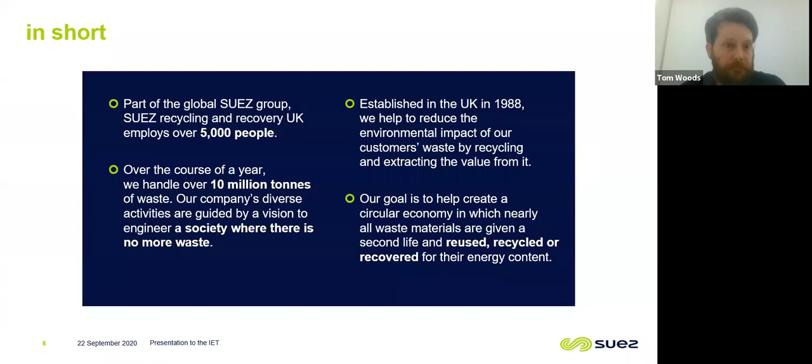A brief look at the figures of the company. I think I will pick out some key ones based on this lecture.

So in terms of our energy recovery, we have 7 energy from waste facilities, which is the mainstay of my work in the group. We have operating landfill sites and closed landfill sites, which have some energy recovery as well through gas combustion. We also have a number of other sites using more novel techniques, which I'll discuss later, to recover energy from waste. I think one of the key figures is the amount of megawatt hours we generate, both from our landfill gas engines and from our energy from waste facilities.

When I started with this company, it was more flipped the other way around, and we were mostly recovering energy from landfill gas. Now we are mostly recovering energy from waste plants, and that trend is only continuing. These are 2016 figures, so it will be significantly more that way now.

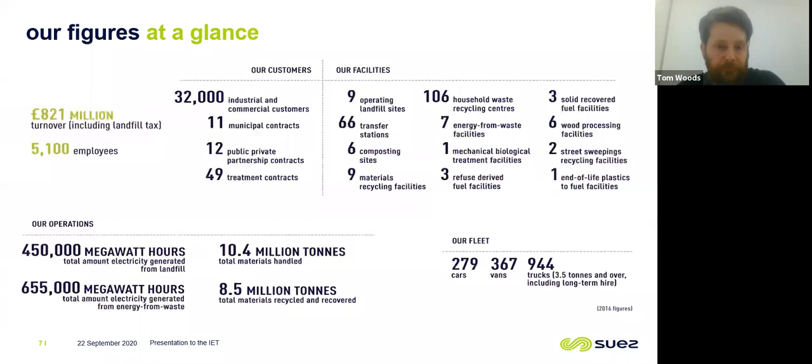As I discussed, the circular economy is the guiding principle of SUEZ. You can see the various parts of the manufacturing and economic cycle here. The bit where things come out as waste is what we're trying to cut down on, and that's traditionally what SUEZ, or SITA as it was, did. It collected waste and threw it in the ground, and that was really the business. Now we're looking to do things a lot more intelligently, a lot more sustainably, I think, is the key.

So the part of the company I mainly sit in is this part here, the recover part, so energy from waste. We're looking to recover the energy from the residual waste that can't be recycled.

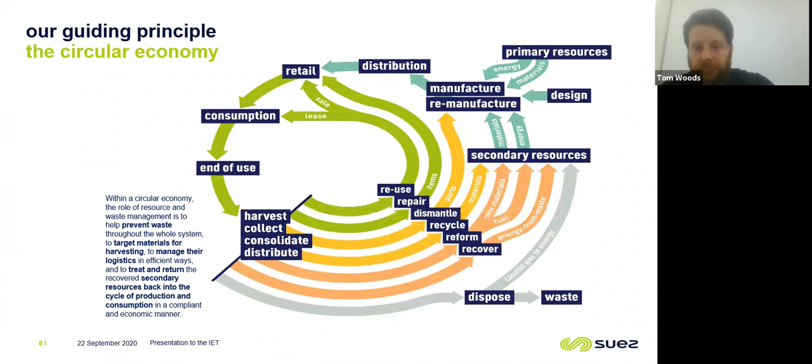I mentioned that we have a French parent company, SUEZ. We originally started SITA with SUEZ. This is just to give you an idea of the global scale of that business - it's waste and water. Obviously, I work on the waste side, and we talk about waste today, but we see there's a substantial water business as well. We're based in Paris, a large multinational company.

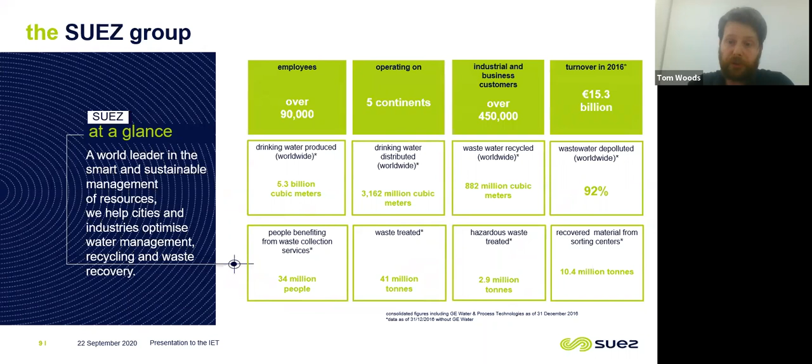A couple more key figures. I think we've had some of these on a previous slide, but you can get a sense of the scale of the amount of tonnage we handle through our facilities each year.

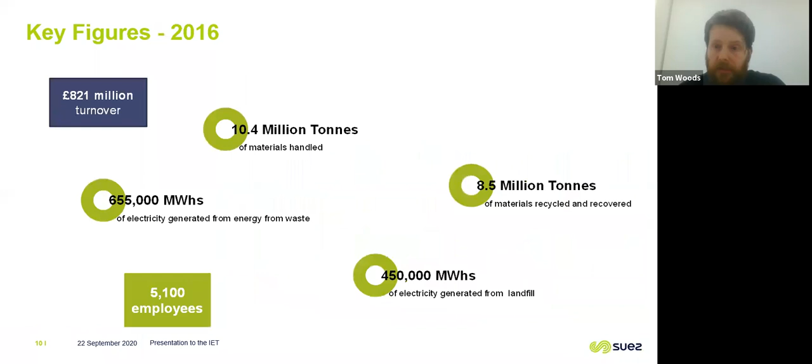This slide I touched on a second ago really does illustrate the change both in SUEZ and in the waste industry in general in the UK. This graph started only in 2009, so it's not that long ago in the grand scheme of things, and you can see the high percentage of landfill our business was then - we're looking at 90% of our business being landfill, potentially a bit more, as you see from that graph. That was obviously just before I started at the company.

As we move forward, you can see a very rapid increase of energy from waste, a very rapid increase of alternative fuels in our mix, and also the recycling. This is a projection, currently based on 2017 figures, but as you can see, we've continued to grow on the energy from waste side, and landfill continues to fall.

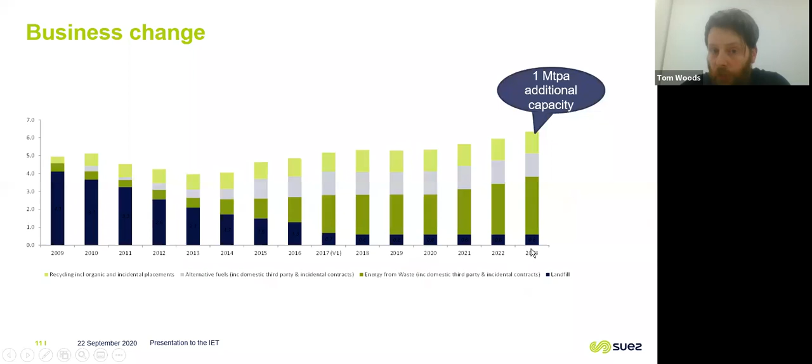So I mentioned it in passing, but municipal solid waste, that's MSW - that's your general black bag waste, as it were. That's what you produce domestically, what you put in the bin. It's everything that you don't put in the recycling bin, or the food waste bin if you have one. You can see this is a typical composition of what we get through.

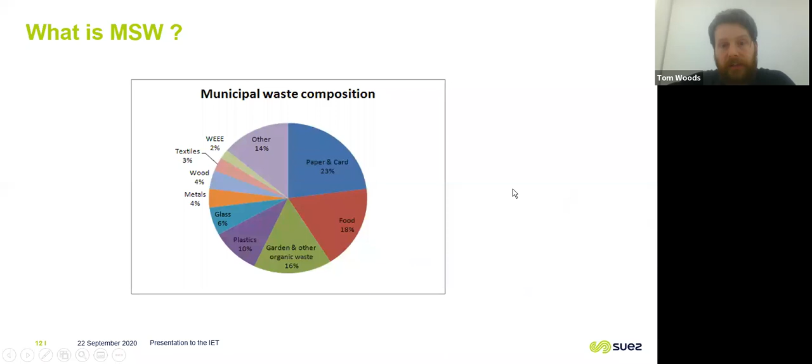I'm not sure what site this is from, but there is a surprising amount of regional variation between the different sites we have around the country, which is interesting. You can see here we have paper and card, plastics, garden waste. Food waste is one that some areas of the country collect and recycle, and some don't. What I want you to take from this slide is that it's a mix of stuff - it's heterogeneous waste, and if we try to use it as fuel, it's a heterogeneous fuel.

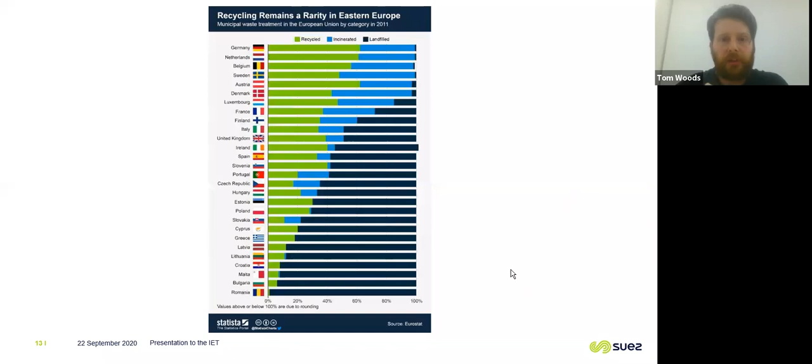So the energy from waste process. Let's start with the process, which is combustion. It's a thermal process - you are burning the residual waste. It's direct in most cases, so the majority of our sites have a moving grate, which we'll show some pictures of later. This is the industry standard method - this is what generally happens around Europe and around the world. There are 4 stages on the grate.

You have drying, where the water is driven off, the sensible water content. We then have vaporizing, where it's starting to heat up and releasing gases. They then oxidize, which is the complete combustion, and burnout removes any residuals that haven't been burnt, haven't broken down in the first 3 grates.

The furnace with the grate is then immediately above it, so it goes up into a water tube boiler to start to extract the energy from it. We have later stages I'll come to later, but it's around 4 hours from the waste going into the hopper at the start of the process to being completely incinerated.

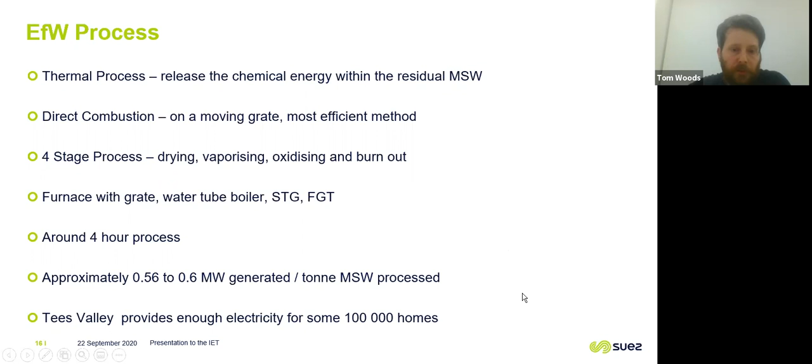We tend to get around 0.56 to 0.6 megawatts of generated electrical power per ton of waste processed. So you can see you can get fairly significant amounts of power from the waste. Tees Valley, one of our older facilities up in the northeast, provides enough electricity for 100,000 homes.

So to go into the technicalities of what's actually in the fuel - I know we saw a brief overview in terms of what people put in the bin - but you get things in the fuel such as moisture content, ash, and various potential pollutants. You get chlorine, sulfur, things that could potentially cause us trouble when we burn them if we don't burn in the correct way and treat the residual gases that come through.

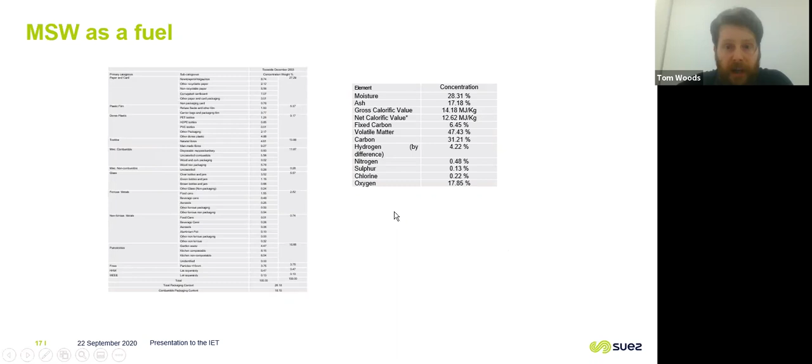Obviously, we also end up with potential operational issues with combustion not being perfect. We're not burning coal, we're not burning gas - we don't know what's in there, and we have to deal with that.

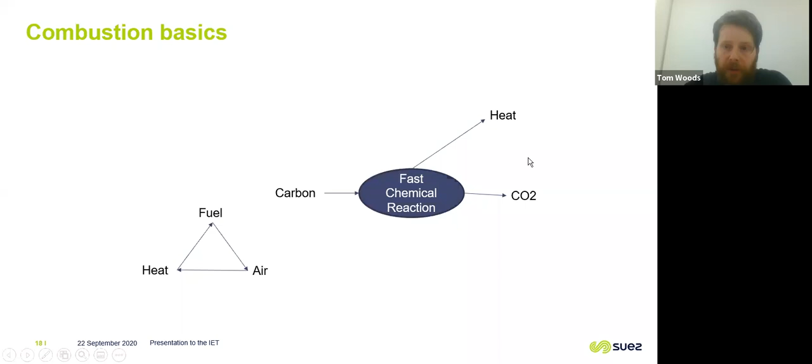Very quick combustion basics - I think a lot of people are aware of the combustion triangle: heat, fuel, air. The majority of what we are combusting in this process is carbon, so CO2 and heat. Heat's recovered in the form of steam being raised, and then that's passed through a steam turbine.

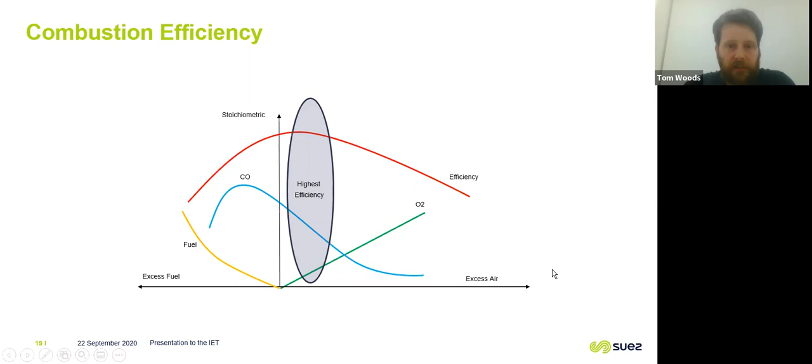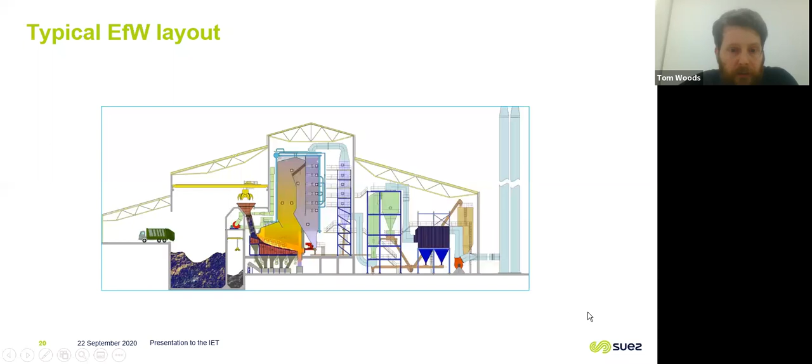The APCR is air pollution control residue, so that's what's taken out of the system by our scrubbers, essentially. That's taken out as a solid out the system. It doesn't go up the stack. It's safe, it's contained. The IBA is bottom ash, so that is the solids, it's solid ash. That's taken.

We recover ferrous metals, recover non-ferrous metals, and the rest is sent to aggregate. So as you can see from all this process, we do keep the circular economy going. We reuse as much as we possibly can in the whole process. And as I said, energy from waste, the key bit is this electricity.

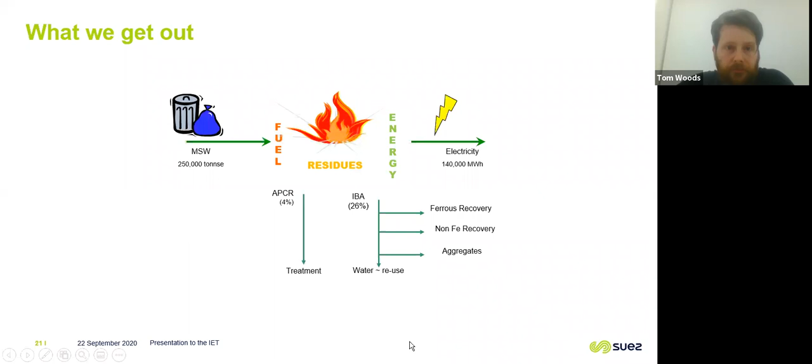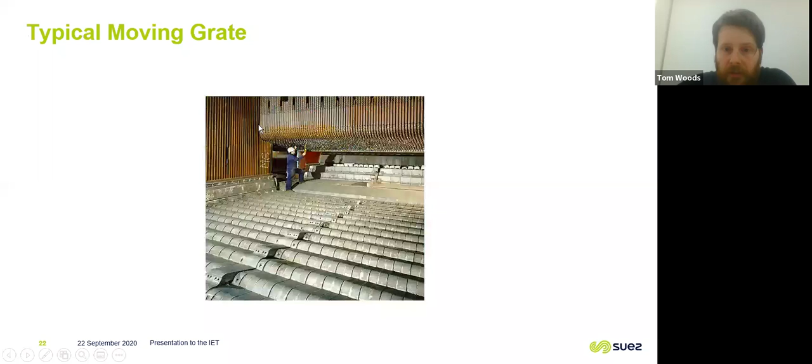And here it is in action. This is typically what it looks like when it's operating. This is our fire.

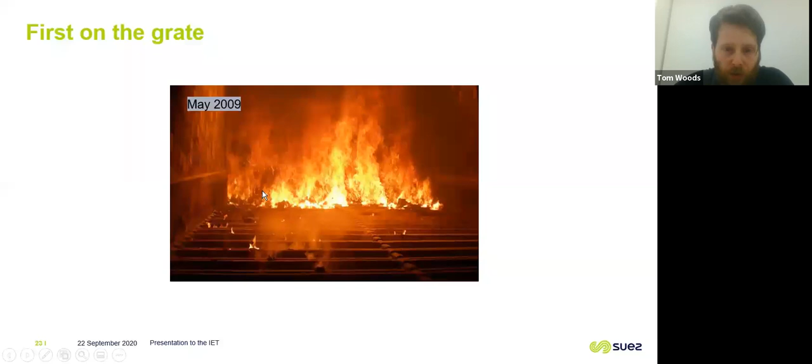You can see the zones very clearly, and the front of the grate is for the burnout. So we shouldn't really get a lot of material there, we shouldn't have a lot of activity there. It should already be fully burnt out. It's just an additional stage. But yeah, you get sort of an idea of how well controlled we need the process. You can see the straight line at the back where the mainstay of the combustion stays.

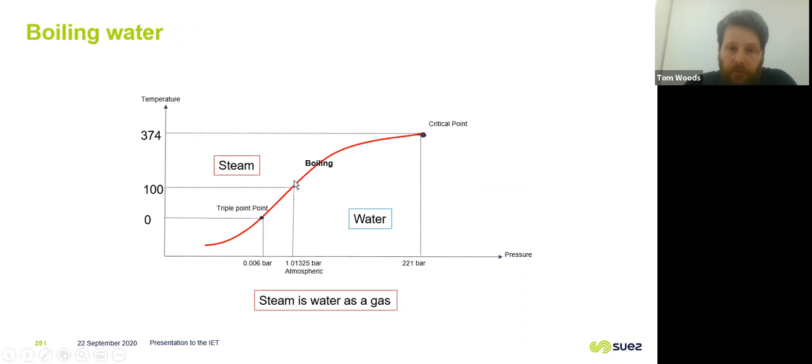Steam. So I've mentioned recovery of the heat and recovery of the energy. Quite a basic process in theory. There's lots of subtleties to it, but we do just take water, heat it up, take it up into its steam drum system, and we raise steam with it. You can sort of see here some of the properties of water.

This is a very basic Rankine cycle. There's more subtleties to it when you look at individual plants, but yeah, we take water, it gets pumped up to the top of the boiler. It picks up all the energy through the boiler walls as it goes there. It comes out the top of the steam drum as steam. It is then further superheated. It's sent through a turbine, and then it's condensed back down to water, and the process could start again. So this water cycles through the system.

We can see here the efficiency is generally between 24 and 32%. That's a function of the combustion cycle, the Rankine cycle, and the various pressures and temperatures involved in this.

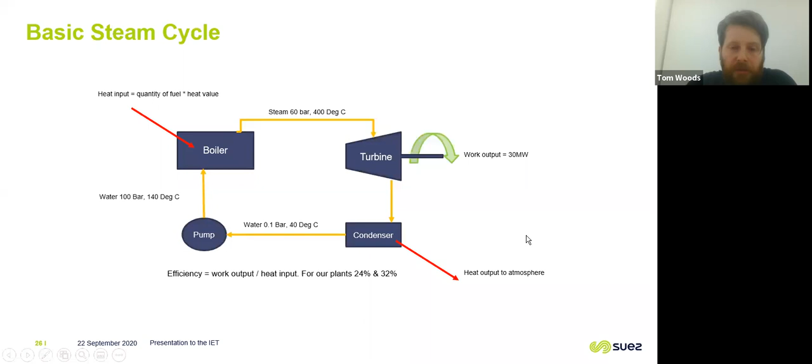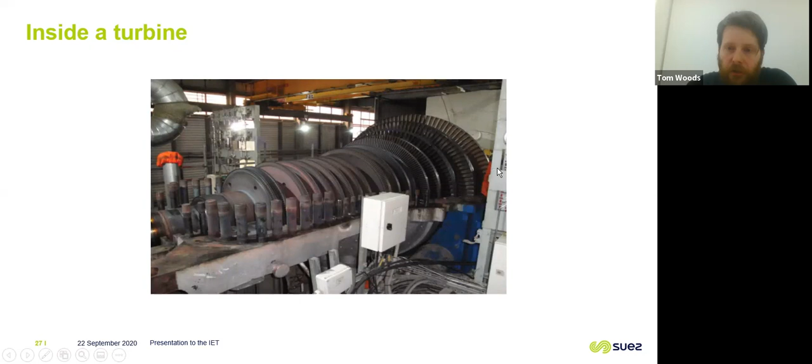The bit of the turbine that spins is sometimes driven into a generator directly, sometimes through a gearbox. The mechanical work the turbine picked up from the steam is sent through a generator which spins at a synchronous speed, 50 hertz, or some fraction thereof. It generates all our sites at 11 kV, which is a UK standard voltage. It's picked up by a transformer generally and goes off to the UK distribution networks at 33, 66 or 132 kV generally.

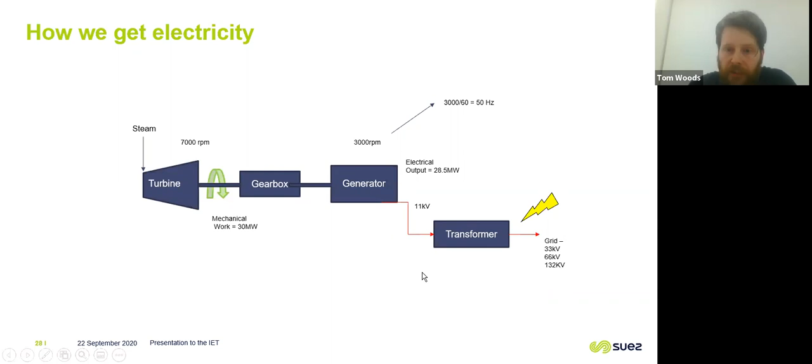I've mentioned before that our fuel has all sorts of things in it, things that if we were to burn it in an uncontrolled, unmonitored, and unsuppressed way, could cause serious pollutants to get to the atmosphere.

We use a fluidized bed reactor to react lime and water in various concentrations. That is sent through the flue gas, and any acid gases in the flue, like sulfuric acid and hydrochloric acid, will be scrubbed out. These result from things like PVC plastics and plasterboard going into the front end of the process, which shouldn't be in there but sometimes are. These produce acid gases, which are scrubbed out by the lime system.

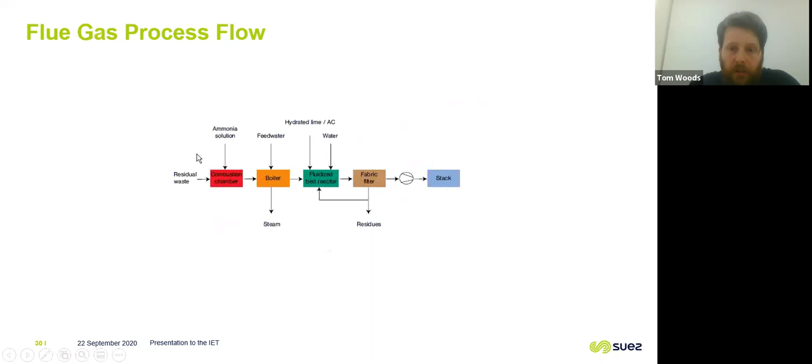We then have a fabric filter, a baghouse. It's a very basic principle, a physical barrier. It takes out all the fine particles of dust, which stick to the fabric and get knocked off into the residue chamber. What goes up the stack is monitored 24/7 by ourselves and the Environment Agency, and we have very stringent limits on all these pollutants. This system ensures we always meet them.

I mentioned selective non-catalytic reduction. The NOx from the waste, or from the results of combustion, both fuel NOx and thermal NOx, reacts with either ammonia or urea and water. The outputs of this equation are water and nitrogen. So we're scrubbing down the NOx as much as we can, since it's a potentially harmful gas.

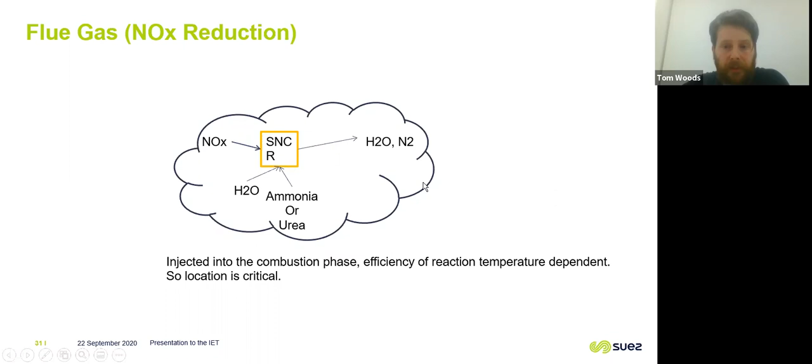You can see here the reactions involved in this process. We're just getting nitrogen and water out the end.

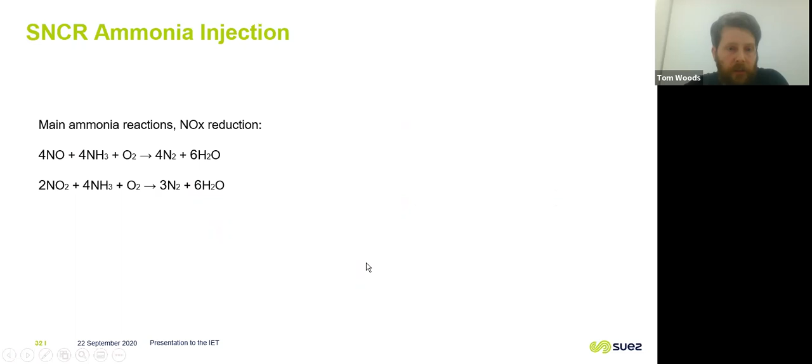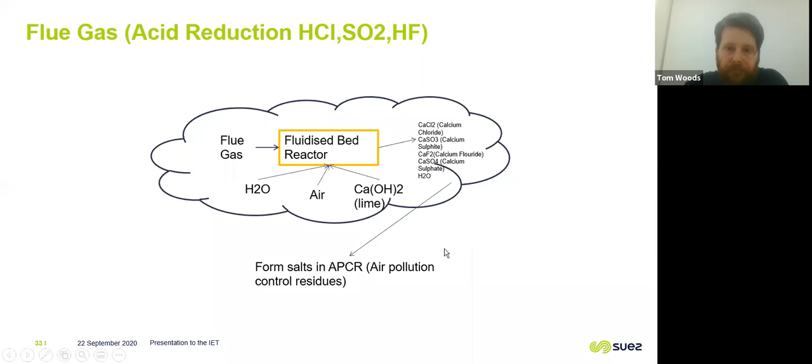As you can see, this is a schematic of the process. It passes through the fluidized bed and is neutralized, then goes up into the baghouse as a clean gas in terms of acids and NOx, with the particulates knocked out and scrubbed by the baghouse.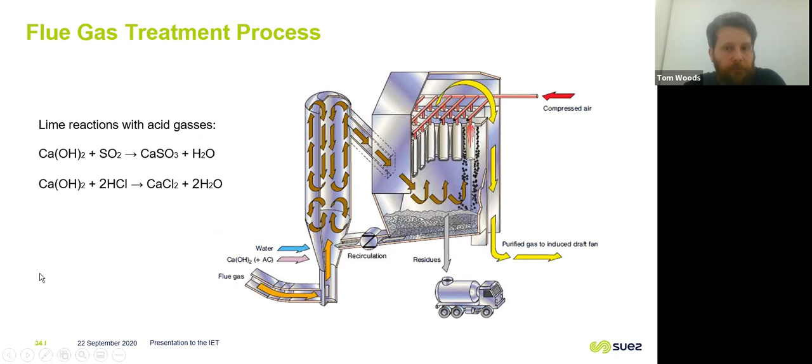One consequence of how incinerators were historically run is that dioxins were formed. Dioxins do get formed from various combustion processes. We are legally obliged to run the process over 850 degrees Celsius, and quite often well over that. We choose to run it well over that to ensure dioxins aren't formed.

We also have an activated carbon system, so any dioxins that are formed, which shouldn't be there, or any trace metals that have come through as part of the waste, like mercury, are then captured by the activated carbon. We can't run without these systems; they are mandatory for us.

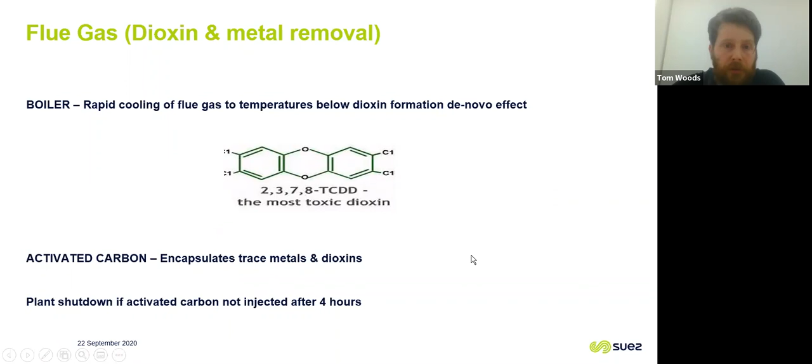The other flue gas screen is this fabric filter, which is a very basic mechanical filter. You can see an example here.

I said we have very stringent emissions limits that we must keep. These are typical examples of what our sites are limited to. We're looking at very, very small amounts of pollutants that we're allowed to pass through, and we do tend to usually meet these. They are stringently enforced by the EA, and we are obliged to meet and record them.

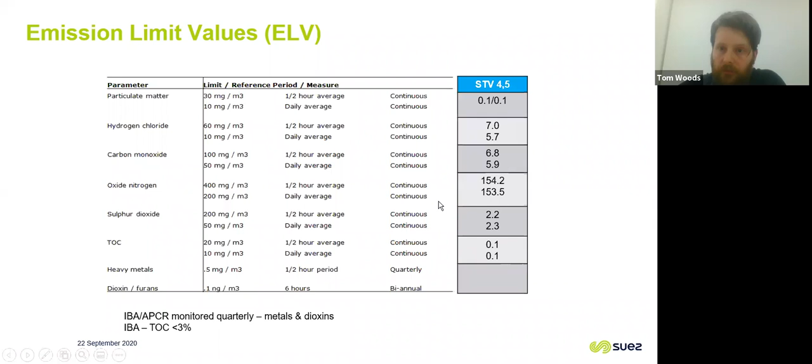Here's a few more things we test for, and you can see the majority are now continuous testing, using a CEMS system which sits in the flue gas and monitors it 24/7. We have a few that are done as spot checks, but the vast majority are continuous.

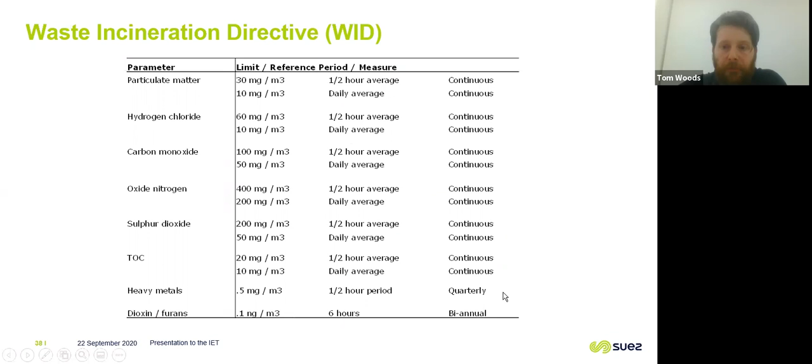So I've given a very brief overview there of the energy from waste process as it stands. Hopefully there's a lot of questions going to be asked at the end, and we can pick it up then if I didn't go into enough detail. This section is just looking at what assets we actually have in the UK.

In the north of the country, we have a number of sites up in Teesside. I think we've got 4 sites here in Teesside - we've got lines 1, 2, 3, 4, and 5, which are all on the same site. Here are an extension of lines 1 and 2. Line 3 was built, and then over the way we've got 4 and 5.

You can see here some of the tonnages involved are quite vast. We're looking at over 500,000 tonnes a year for the Tees Valley site, nearly another 500,000 tonnes for Wilton, which is also in Teesside, just over the river. Then we've got a couple of smaller plants - Kirklees, which deals with the local Kirklees waste in Huddersfield, and the Isle of Man, which looks at all the waste from the islands, and we run that with the Manx government.

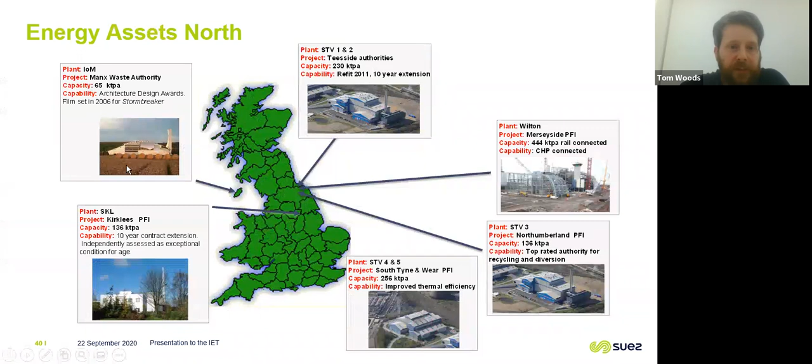The interesting facts are there was a film set in there - Stormbreaker, that was filmed there. But you can see it's won architectural design awards. It's designed to look like a Viking longship.

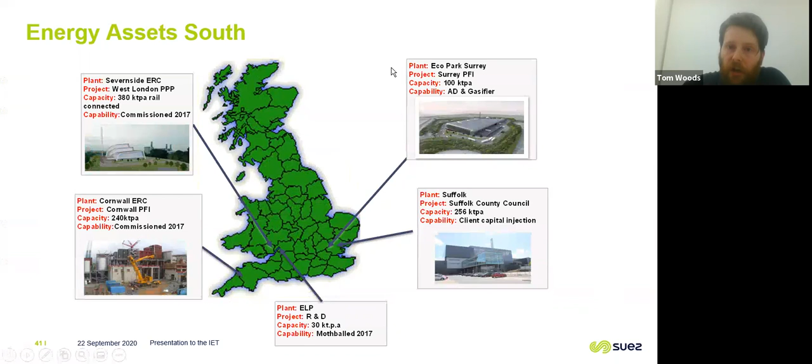The assets we have in the south - you can see there we've got Severnside Energy Recovery Centre, which takes West London waste on a rail link. We have Cornwall, which deals with local Cornish waste. We have an R&D facility, but we've got Suffolk Campus in Suffolk, and we've got a more novel process in Surrey Eco Park, which I will discuss a bit further later on.

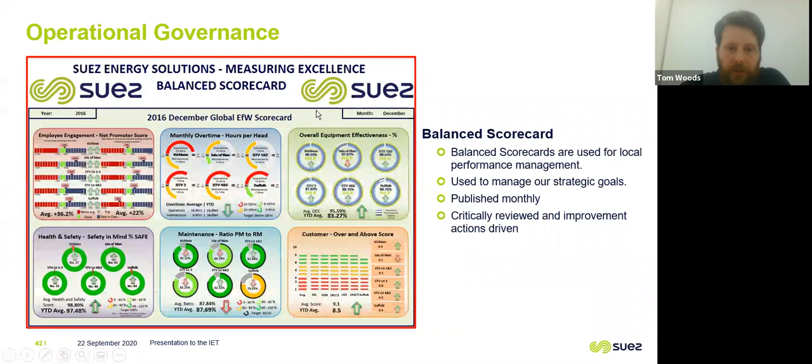You can see here how we run the governance of our various sites. We look at OEE of the sites, we look at health and safety, of course, our key priority. These are the sort of things we look at when we're comparing site to site.

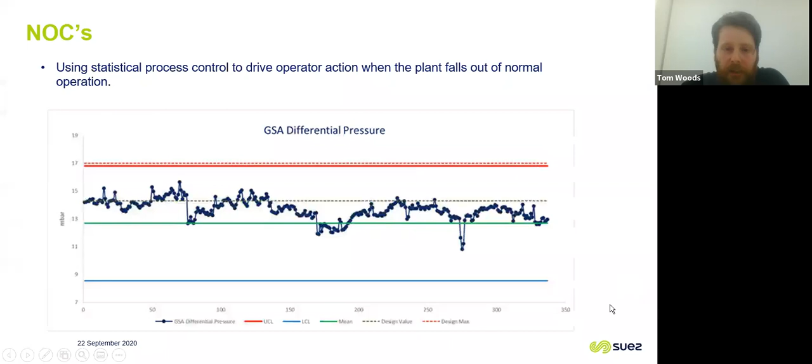This is a slide colleagues in process engineering gave me. This shows how difficult it is to try and control some of our various parameters across our processes. We've put a lot of work into trying to find the point it normally operates at, so we're looking at very, very complex combustion control systems, very skilled operators running these sites, and very intelligent engineers on the process side looking at these processes and putting things like this in place. You can get an idea of the variation you have second by second on these sites.

I did mention before the residue, which is the bottom ash that comes out. This is sent to a company now called Ballast Phoenix, a ballast company. They convert this bottom ash to an aggregate for construction after extracting all the metals we can and recycling the metals.

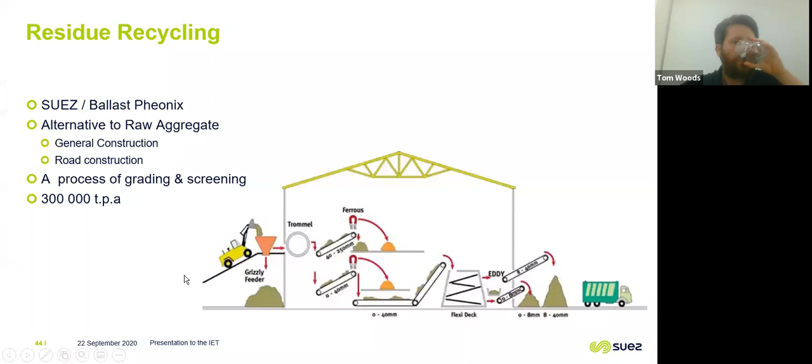So here's a few slides on where our latest developments are on energy from waste. Some of them are what we're doing as a company, and I've also put in a few of my own opinions on things. Hopefully it will provoke a lot of debate and a lot of questions.

One thing that has been of great interest when I've done this talk in the past is the bee project we're doing. We're looking at housing bees in beehives near some of our sites. The pilot project was Tees Valley, which I formerly mentioned. We've moved it to other sites now as well, and we've got some results from Tees Valley now, which I can give you in a minute.

It's an interesting area, Tees Valley, because historically it's an area with heavy pollution going back really 100 years. It's an old ICI site, a legacy of chemical industry in the local area as well. And obviously the wider Teesside area has a lot of industry associated with it.

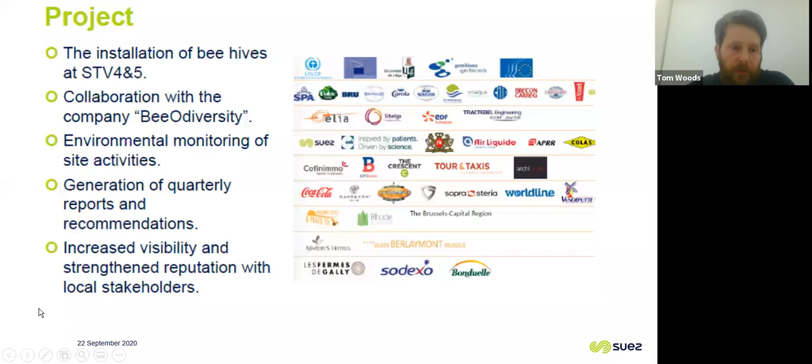So we were really, really interested to see what the results of this were in terms of pollutants, because we were using these bees to monitor residual pollutants that might have been in the area. We wanted to see, first of all, that we weren't polluting the area.

We have continuous monitoring, so we were pretty confident, but we wanted to see the historical impact of the pollution in the area, if it changed over time, and if any other industries nearby may be potential sources of pollution. This was something we did in partnership with a lot of our other sites nearby, because there are a lot of other industrial sites in this area as well.

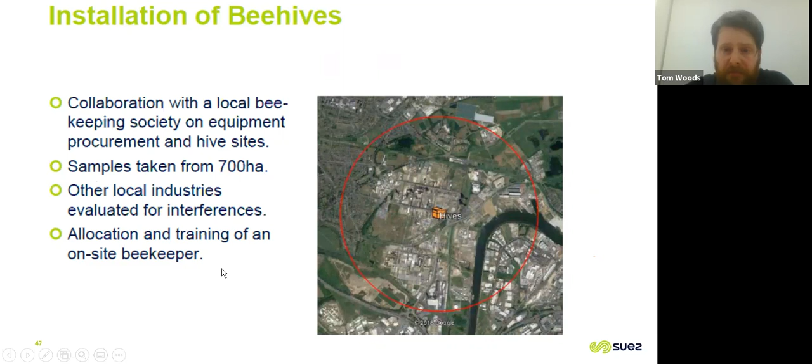So you see the range of the bees from this hive, it's 700 hectares, covering 8 billion samples a year. This is the beauty of using animals to do your work for you. They bring back the pollen, and any of it could potentially be contaminated with pollutants from the surrounding area.

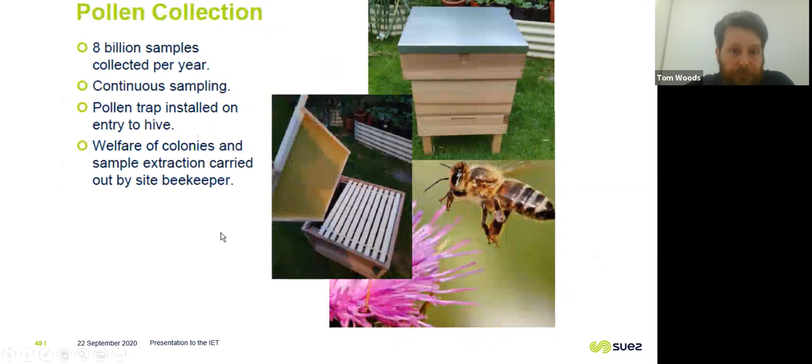We did some analysis of what was brought back. When I first gave this lecture, I didn't have any results, but now I have. We're looking at things historically that could have been bad, things that we now tailor all our processes around not producing. So we've got dioxins, PCBs, and heavy metals, which we do worry may be in waste sometimes, but we have facilities to capture the heavy metals before they go into the air. It's just a really good indicator of the general environmental health of the area.

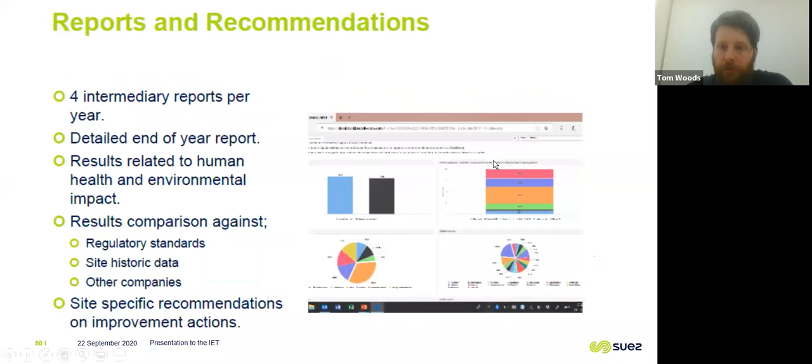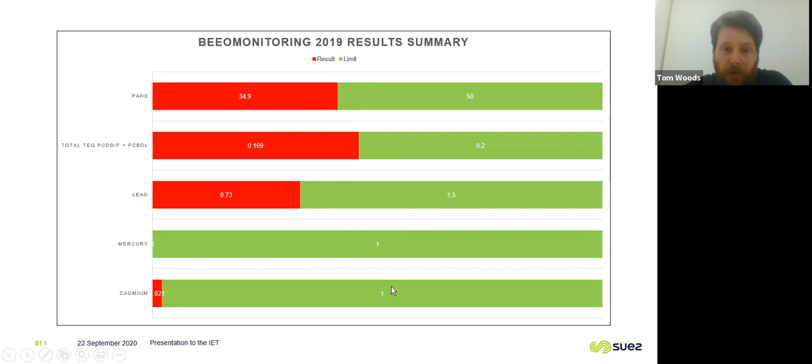I mentioned I'd talk about other technologies used to recover energy from waste. Anaerobic digestion, or AD, is one of those key ones and is a very mature technology now. It's going to become a lot more relevant because food waste is required to be collected separately by 2023 under the English Waste Strategy. It's something some areas now have and some don't, it's very patchy how it's collected council to council. Hopefully this central government strategy will focus minds and get a separately collected food waste stream from every area in England.

Food waste is ideal for AD. In anaerobic digestion, the bugs or microbes in the system break down the food waste in an anaerobic fashion, which produces gas, mainly methane. This is then piped through to a gas engine historically, and that's on our site. We are commissioning this one, but I think the way the waste industry is moving forward, we're moving towards directly injecting this into the national gas grid. That's a technology that maybe 10 years ago we hadn't quite perfected on a commercial level, but now these sites are directly injecting gas produced from microbes into the gas grid from food waste.

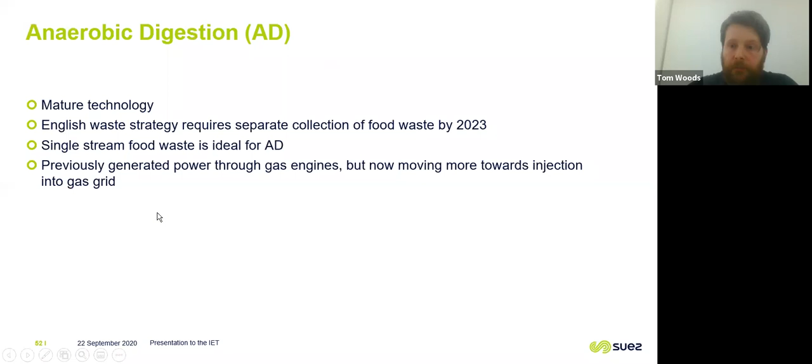Gasification is an alternative way of breaking down municipal solid waste, other than EFW, which we talked about in the past, which is direct combustion burning. Gasification breaks down waste using heat and limited oxygen, breaking it into its constituent components, and the resulting gases produce a combustible gas. At present, our site raises steam from the gas, which drives a steam turbine. This technology has been looked at over the past few years because, number one, if we can produce a gas, we can look to increase the thermal efficiency mentioned before, of 24 to 36%.

I'm sure a lot of you are aware of combined cycle gas turbines in the power industry, the natural gas world. They have much better thermal efficiency because they run combined cycle. So you'd have the gas run through a gas turbine, then steam raised from the exhaust to run a steam turbine as well, or you could potentially use reciprocating engine technology. Either way, you could hugely increase efficiency using this.

Some way down the line, there's potential for direct grid injection of this gas into the national grid for domestic use. That's technology that's being looked at.

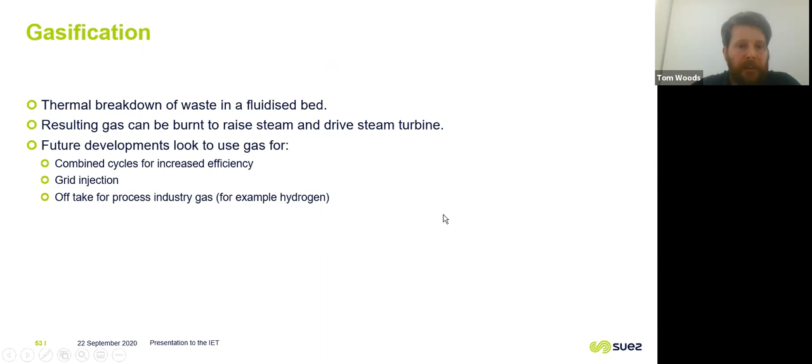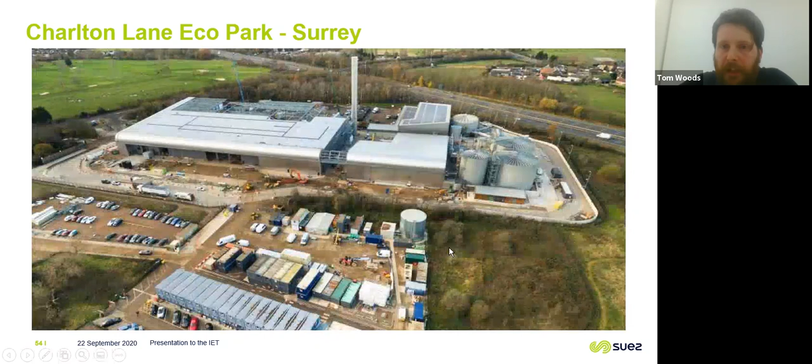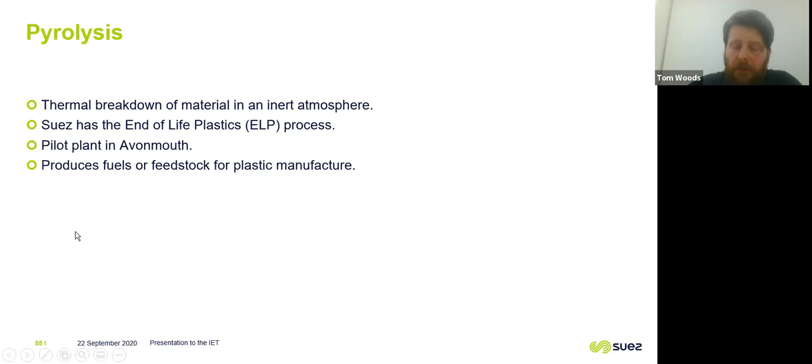Another process we're looking at, related to gasification, is pyrolysis. The difference is gasification takes place in low oxygen conditions, while pyrolysis is inert - zero oxygen conditions. We have a very interesting technique we're looking at, breaking down plastics into a gas using pyrolysis. We have a pilot plant in Avonmouth, and we're looking to produce potential fuels or feedstocks from this. So you're breaking plastic down and reassembling its constituent parts - it's part of the circular economy.

In summary, when I started in the UK waste industry, it was very different than it is now - I was the first electrical engineer taken on by the company. We've now got a team of engineers, we work closely with other companies, we're very heavily technical. It's night and day. It was starting to go that way already, but in the last 10 years the pace of change has been huge. If we go back 20 years to 2000, late 90s, it's even more so. Back then we were almost entirely a landfill company with a small portfolio of energy from waste, and now it's flipped the other way.

Energy from waste capacity, as you saw in the chart for SUEZ, but it's the same across the board across the UK - it's increased massively, massively in the last few years. So we are now sort of heading towards the capacity that certain countries, like Germany, already have.

Industry continues to change at a fast pace. Yeah, it really does. As I say, we're looking at all these options for circular economy. We're looking at upcycling materials to be introduced back into the front end of manufacturing processes. We're looking at high grade fuels. I think this is going to come, and it's going to come fast. It's certainly something that's on our radar. And the final point I'd make is, as you also saw in that chart before, as a residual waste recovery person, someone who works in that side of the business, we need to act in unison with recycling, and more importantly than all, reduction in waste - because the easiest way to deal with waste is not to produce it in the first place. When all these strategies work in tandem, it can work very well.